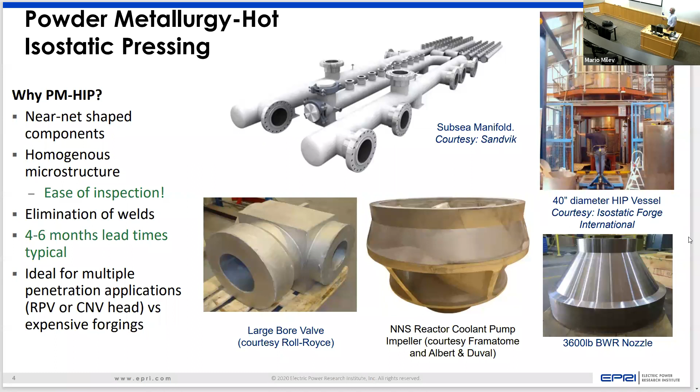This is one of the very first components we actually made out of the project. This one's at 44% scale, and the reason it's at 44% is that's the largest vessel we have today available in terms of size. It's 50 inches in diameter—about the largest we could actually put into a hot isostatic press and make that component.

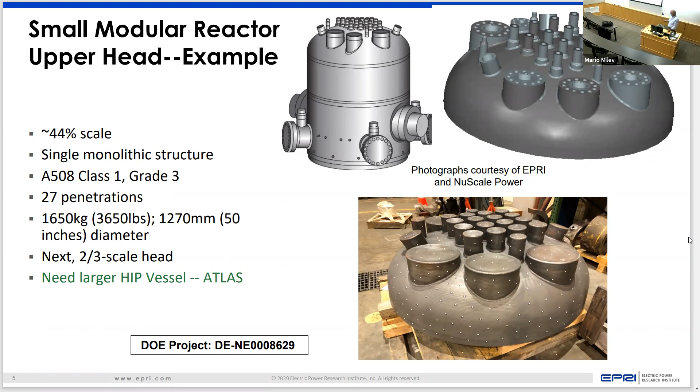This is one single monolithic structure—there are no welds whatsoever. The welds you see around here are on the can or capsule that sits on the outside of the powder as it's being consolidated. This thing actually shrinks over time as you put it into the hot isostatic press. It may take 4 or 5 hours, 6 hours to get to this size. But you can see we can make very complex structures with this technology. That's why we focused on powder metallurgy and hot isostatic pressing.

We've also manufactured the lower section. Let me step back—this is the lower assembly, and this is the lower head I'm getting ready to show you. You see the upper head on the first one on the right-hand side. So the lower section of this, we're actually making in 2 halves.

Now, obviously, that's not the way we would do this normally, but again, we do not have a hot isostatic press large enough to do that. So we're making it in 2 sections and electron beam welding it together, then going through a heat treatment to actually get to the final properties we're looking to achieve.

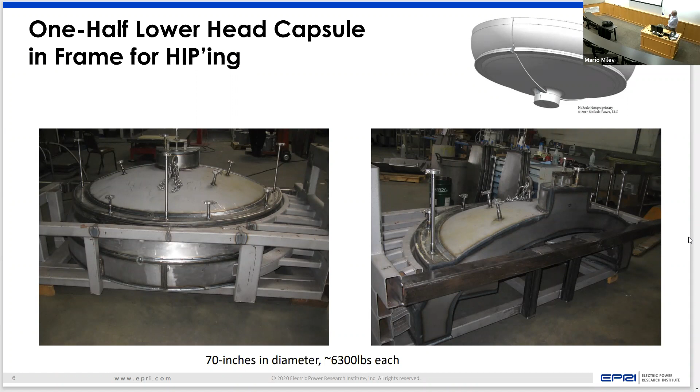So you see all of the fill stems and the vents coming off of that. It's where the powder is actually poured into the component. And then you end up with a component that looks like what we're showing here on the right-hand side.

So we then take this and actually weld it together to another half, and we end up with a solid half. Now this is upside down right now - it would actually be flipped up. So this is the bottom section.

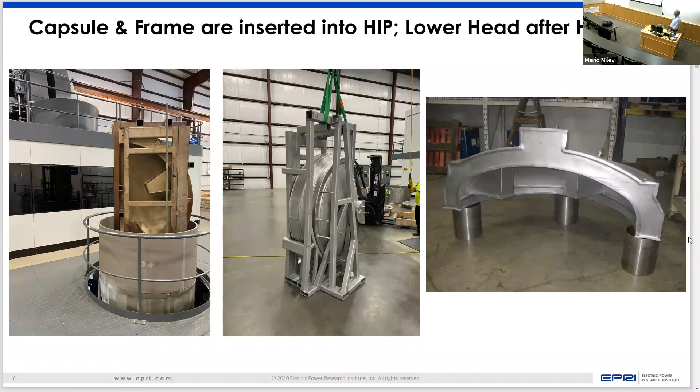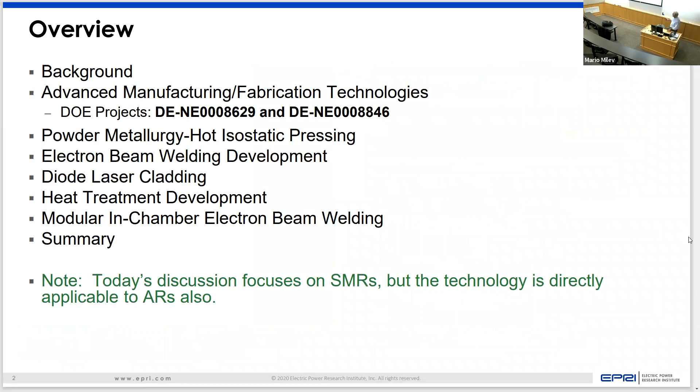So we've went through a lot of development. I guess I ought to describe one other thing here. So let me skip back again.

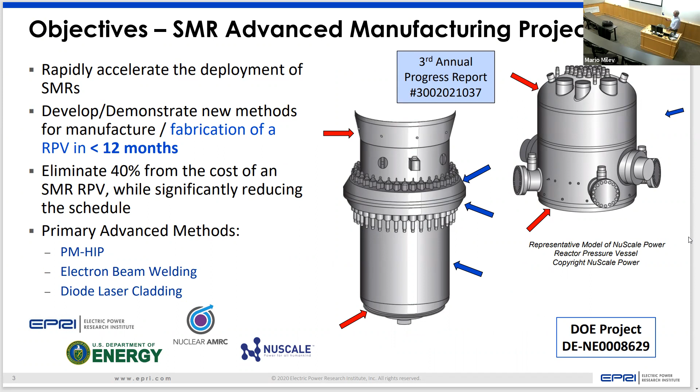So there's a transition section up here, and if you notice, we're again showing it as a red item. So we're doing it also with powder metallurgy. I typically wouldn't do that with PM-HIP - I would do it as a forged component, but we're trying to demonstrate some of the technologies, and that is what you're looking at right here. That's one of the 5 sections that will be necessary to build that circular transition section.

In trying to make this, we are using gas atomized powders. Those are air melted powders. They pick up a lot of oxygen in the overall process because you're making with an air melted process, as opposed to a vacuum inert process where you might actually do much cleaner atomization of the powders.

So as we make those powders, we're making with air melt. We've picked up a lot of oxygen and issues. It has changed our properties, and that's one of the reasons that we're really going through a lot of the discussions here. Let me talk about this.

First of all, if we're producing a powder using the air melt process, we take it through a vacuum annealing process in the canister - so this is actually in a canister. You take it through the vacuum annealing process, and you can improve the overall toughness pretty dramatically by just vacuum annealing the powder before it's sealed off and actually goes into the HIP vessel.

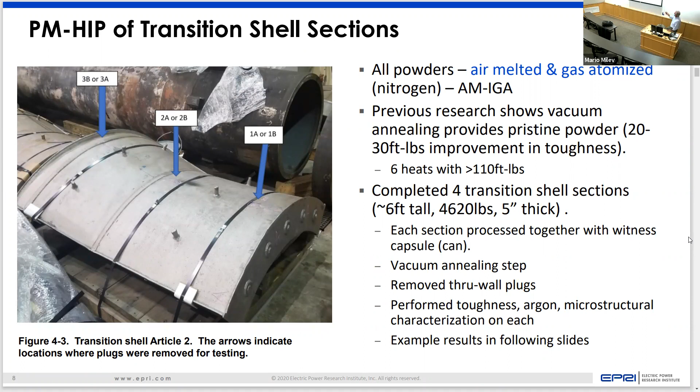So we've spent a lot of time developing that. This thing is pretty large - it's about 4,600 pounds, about 6 feet tall, and it's actually a little more than 5 inches thick. That's probably more like 7 inches thick in certain areas.

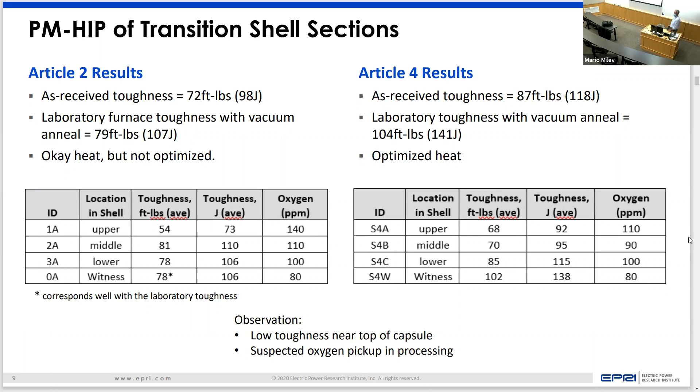So we've had to go through a lot of development. I'm not going to talk about some of that development - it'll be in the slide package, you guys can go through that. I simply wanted to introduce the concept of powder metallurgy and hot isostatic pressing. I've got a number of other topics I want to go through.

Just wanted to jump right onto electron beam welding since we've only got a limited amount of time here. And if we have time, we can go back and talk a little bit more about that.

So we're trying to make large components using powder metallurgy and hot isostatic pressing. That's the first advanced manufacturing technology that we're using. Hot isostatic pressing has been around for 40 or 50 years, first developed at Battelle in Columbus, Ohio. It's been used many, many times over the years.

We are the first ones that are really taking it and using it for extremely large parts. So there's a scale-up factor that we're having to go through, to scale from something the size of maybe this computer screen to something the size of this desk or even larger. And it's all about properties - how do you scale to get those properties?

We've shown we can control the overall distortion issues that you have, as you're trying to model these things and come in with something that's very near net shape. You saw the upper head section already. What we're trying to do now is scale it and get the properties, and we've been working on that for about 3 years. We're close - not totally where I want to be, but we're getting close.

So let's talk about electron beam welding. Anybody familiar with electron beam welding? Anybody familiar with welding, first of all? There we go, okay, got that. All right, so electron beam actually uses an electron beam to melt the materials.

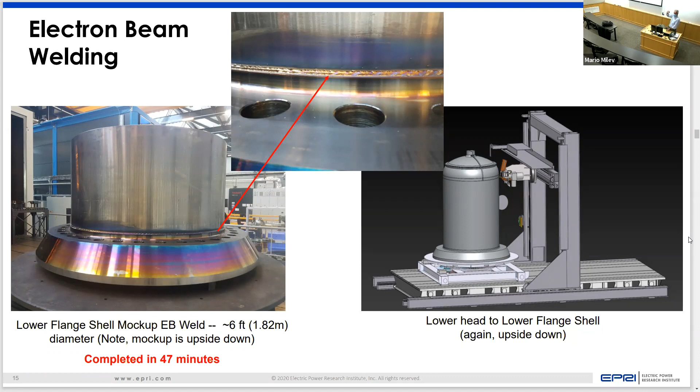This is part of the work that's ongoing at the Nuclear Advanced Manufacturing Research Center. It takes that lower head article that we've shown and actually then goes through and machines it and allows us to put all of that together and weld it together with the electron beam process.

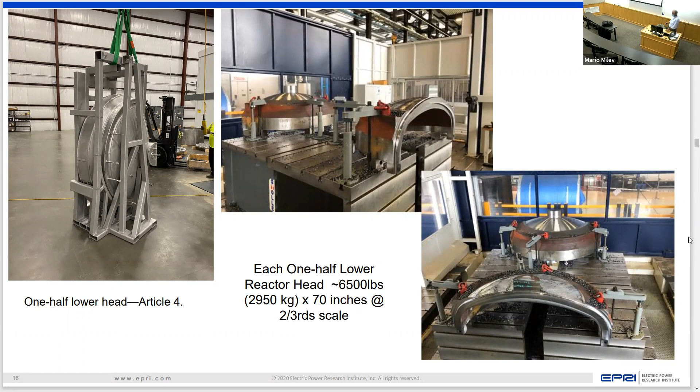A little bit more on the welding. You can see where it's actually been completed here, the weld here. This top part of it, which is actually the bottom part, will actually be done with additive manufacturing. It's a support plate, so it really doesn't have to have anything but structural integrity. It's not toughness that matters there. The toughness and strength actually matter for the rest of the vessel.

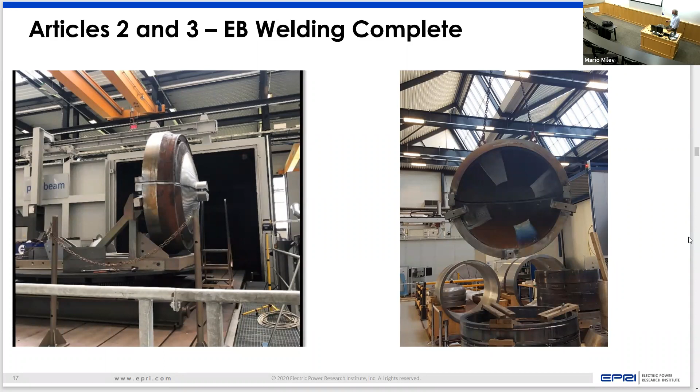This shows a little closer view, the actual weld joint and then the actual weld that's been done here with this particular component. And then this actually goes to final machining.

So a lot of big parts that we're working with, these aren't the biggest parts. If you look at a conventional reactor, for a boiling water reactor, we're probably talking on the order of 18 to 20 feet in diameter, maybe larger in some cases. For a pressurized water reactor, you might be talking 12 to 16 feet, somewhere in that range.

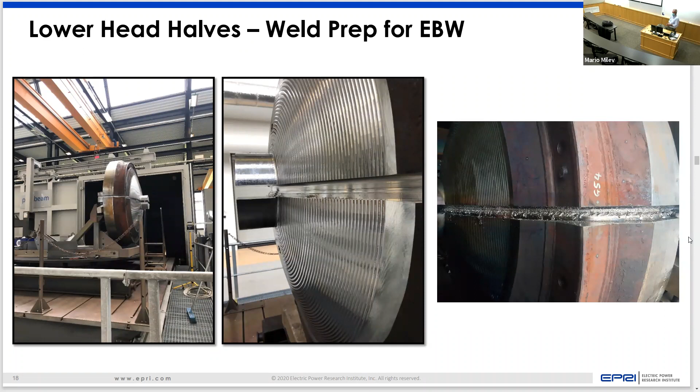These are, again, going to be at about 10 feet in diameter for small modular reactors. And then as we get to advanced reactors, that's actually probably going to collapse even smaller in terms of overall size. So that's another technology. That's a significant game changer again for industry.

We are working with the Advanced Manufacturing Research Center, but we've got Babcock and Wilcox working with us, Doosan, NuScale Power, the Welding Institute out of the UK, and many other folks like Rolls-Royce that are really engaged in the overall discussion and trying to implement this technology and take it forward.

A third technology is diode laser cladding.

So normally when you manufacture a component, a large reactor vessel, you will want to clad the inside surface of those components for corrosion performance. They're either clad with an Inconel, a nickel-based alloy, or probably a 308 or 309 stainless steel, which again gives them the corrosion performance on the inside surface of the vessel.

Normally, we've used submerged arc welding or electroslag welding, which puts down a very large bead. It's all semi-automatic at best. So what we're trying to do is automate the process, and diode laser cladding enables you to do that. It also enables you to put down a much thinner layer on the surface so you get less distortion overall.

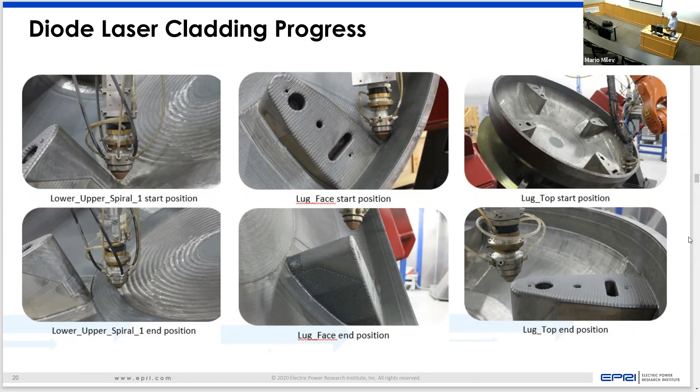You can see a number of different computerized welds that have been done here, or clads that have been applied to the surface of this. What you're seeing here is actually one of the support structures that's inside of the lower head. So inside of that head, you've got to have support structures that support the rest of the reactor internals. You can see a lot of the different welds that have been performed here. Again, this is being done at the Nuclear Advanced Manufacturing Center.

There were probably 8 or so different programs that we had to develop to actually weld this component, but we fully automated the process. You could go out today and utilize that to clad the inside of a reactor. This was a very difficult, complex problem, but computerization obviously allowed us to do that.

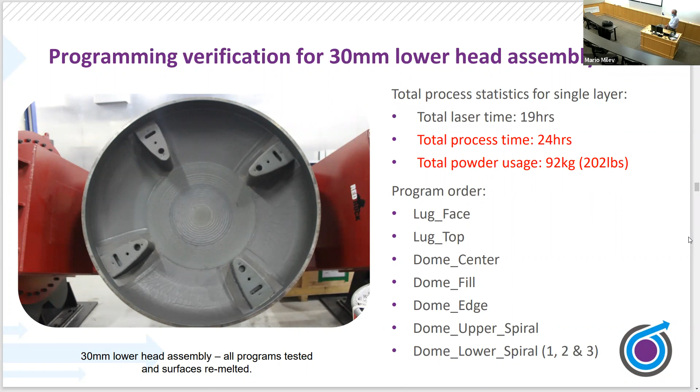We've reduced the time to do this to about 24 hours from probably a 2-week cladding process. That's a pretty big game changer. Another big changer is we only used about 200 pounds of filler material on this. The small modular reactor we're talking about will have enough surface area, basically the same surface area as 2 Olympic swimming pools, because it's clad inside and out. So by reducing that overall amount of filler material, you're reducing cost and reducing the overall amount of time you're trying to apply that cladding to.

So that's 3 of the technologies we've worked on. Another technology you look at and say heat treatment. What can you do in heat treatment that is revolutionary and can significantly help industry? We've been focused primarily on looking at how we can eliminate the weld.

Basically, once we've done electron beam welding, we're not putting any filler material in it. So you don't have the issue that, depending upon the filler wires used, can lead to embrittlement of that structure over time. Many of the early reactors built in the US used somewhat inferior filler materials, in terms of tramp elements like phosphorus, sulfur and copper, which ultimately led to embrittlement of some of those. We have to watch those very closely. We know where those are at and we know what the life of those are.

What we're trying to do here, though, is because you're not putting any filler material in with the electron beam process, you go through a heat treatment situation where you can actually essentially remove that weld. So if I remove that weld, do I really need to inspect that at 10-year intervals? Normally I inspect every weld in a reactor vessel at 10-year intervals. Will I have to inspect this now?

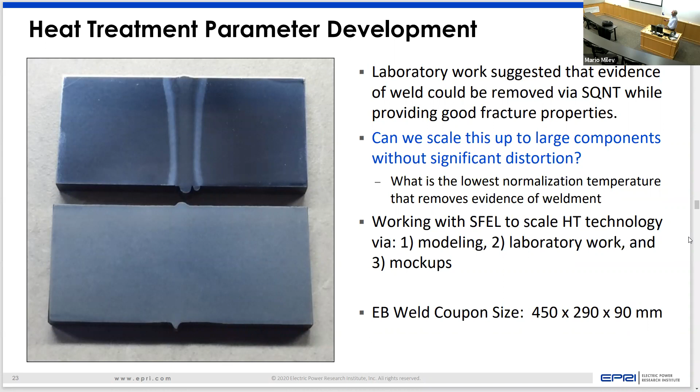We've done a lot of heat treatment work to understand those, and essentially we've arrived at working at 875C, still providing good properties. You can see the trail off here, but we're showing good properties in terms of toughness at around 875C heat treatment. That heat treatment involves a homogenization, a quench, followed by a hardening or normalization of the material, another quench, and then a temper.

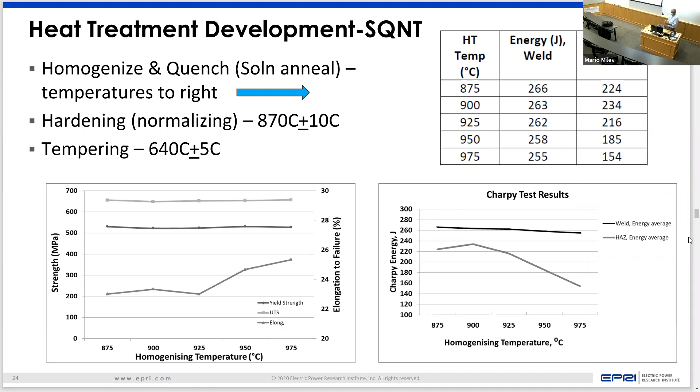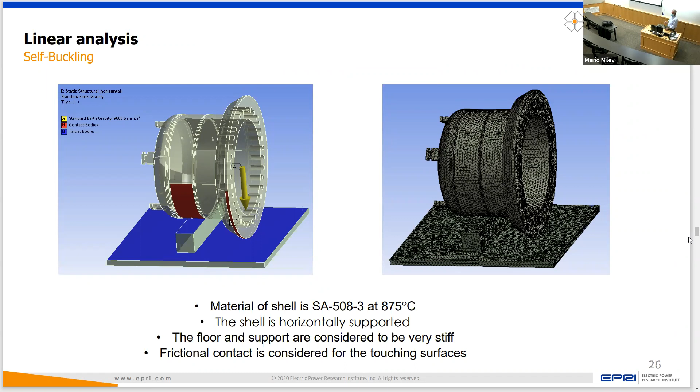So it's reasonably complex. You got to think about this in large sections that we're working with. How do you heat treat those without distorting them? So we've been working with Sheffield Forgemasters, a large forging house, to go through some very complex analysis on these and modeling to understand what the stresses are on those and what types of distortion we might be seeing. We basically said, yes, we can do it. We're now in the phase of taking this forward.

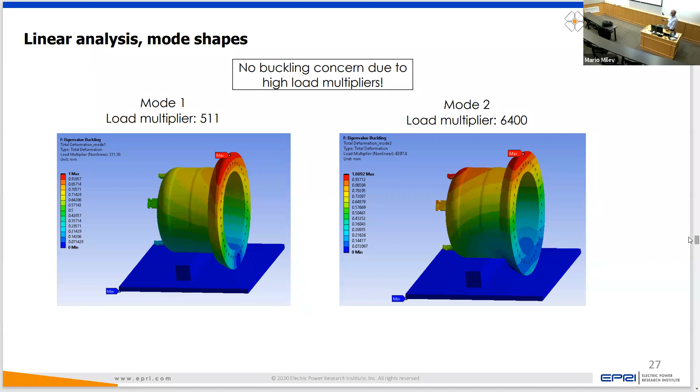We've done one smaller section like this, which represents a head we'd be working on, and one shell section we worked on. We're now moving to a larger size, with the full intent that one of these days we can do this at full size without any significant distortion. So this is a big deal - large forging house, lots of heat, lots of issues ongoing in the large forgers that I'm not typically engaged with, but this is a pretty complex problem.

So this takes me back to this component - the lower head, the shell section, these two flanges, and then this transition section. So big components.

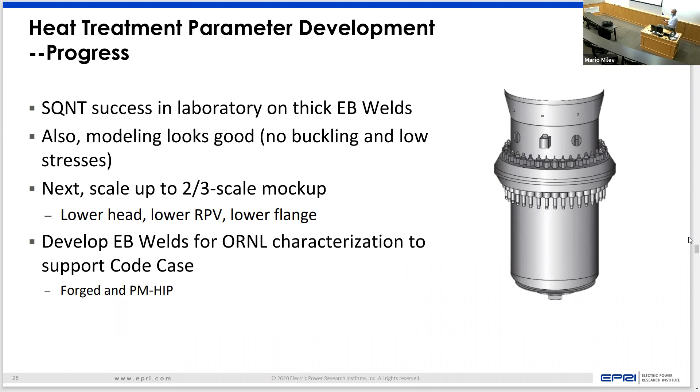From a modeling perspective, we've been able to demonstrate that we don't think we're going to get significant distortion. We've done it at smaller scale. We're moving to two-thirds scale and then eventually full scale. A lot of this work would then support a code case that would go in front of the ASME boiler code to allow you to utilize the technology, and then the NRC would have to come on behind that as a regulator to support the use of the technology.

So that's four technologies I've talked about. One of the other big projects, an entirely separate project in and of itself, is looking at that large chamber you saw - it's not large enough to do a full-size small modular reactor. Even a small modular reactor might be on the order of around 35 feet in total length or height. So that vessel section, that chamber, is actually not large enough to do the heat treatment and/or the welding.

So we're actually looking to set up a modular vacuum chamber that'll allow you to do this process. Let me walk through that in the last 15 or so minutes here. So I showed you this a few minutes ago - this is the large weld that we did in 47 minutes.

What if we could actually build a chamber that you could take apart and put back together, depending upon the elevation of the weld you're trying to make? This one only has two welds represented here. Let's imagine this gold section is the reactor vessel, so this is the shell section. Here's that large flange, kind of what you see here. So that's the first elevation, but you need to get to this next elevation too.

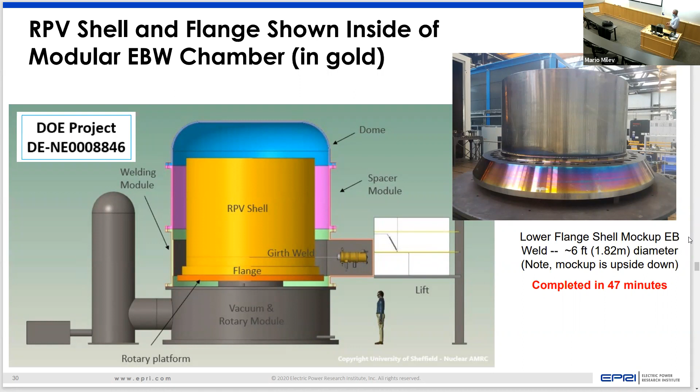So we've been working on that - this was a concept we had. We're working very closely with BWXT and the Navy to do this work right now. The Navy's very interested in this, and you can think of why they might be interested in large diameter vessel applications. So we've been trying to do a lot of modeling to develop that.

Again, the green section here shows where the shell section would be. We've done a lot of development around how this platform looks. We're into the second year of this project, and the project's really taking off. We're actually making lots of large components now, making these large modules for the overall welding application. We've already manufactured the electron beam gun that you see here - I'll show you a picture or two of those in a moment. A number of the controls are already done.

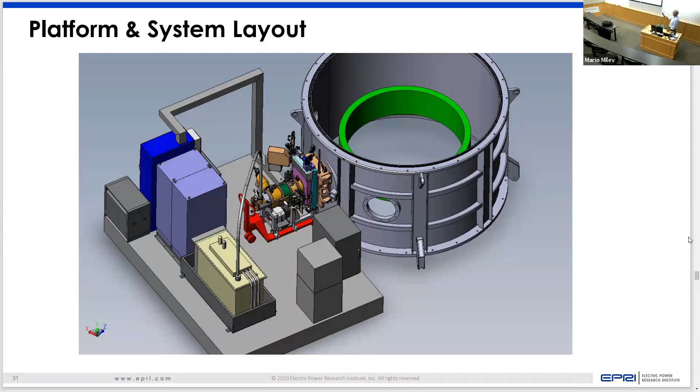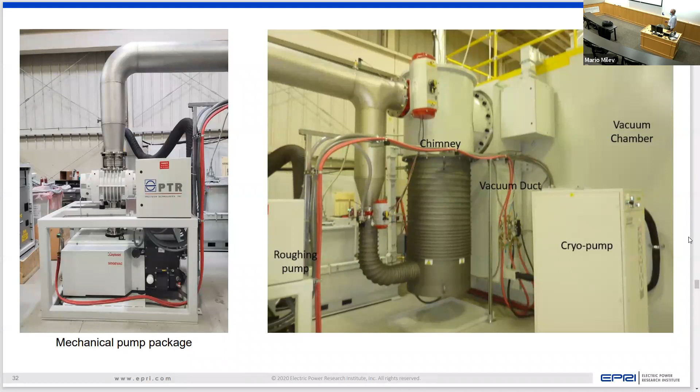Lots of things still need to be developed in this project though. We've been working on developing some of the pumping capabilities. Think about this thing - it's 35 feet high when it's all stacked up. I can't sit there and wait for days for this to pump down to 10 to the -3. It takes a long time to pump that. So we've got capabilities based on all of our design work - we think we can pump it down in about 2 hours. That's what we're working toward right now, large pumps in terms of what we're trying to manufacture here.

This kind of shows some of the overall equipment. There's the vacuum chamber.

This is a chamber that we've actually set up in Connecticut with a group called PTR. It's a smaller chamber, and we're trying to test out all of our equipment and make sure everything works, especially our big electron beam gun.

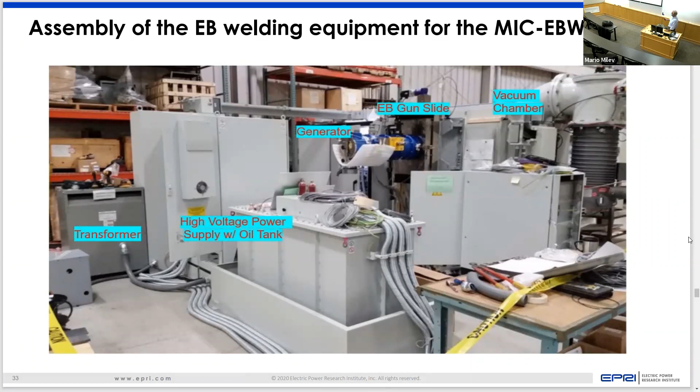We're using a different style gun than what we've used in the UK. It all had to be developed domestically because this is a Department of Energy funded project, so we're developing it with our counterparts in Connecticut. You see some of the transformers and high voltage packages.

This is the electron beam gun itself. It's about 1,000 pounds. It generates the large electrons that are necessary to go in and actually make those 4.5 inch thick welds that we were talking about.

This is just a big slide package that's sitting on the outside of a small vacuum chamber right now, again, to test out the technology.

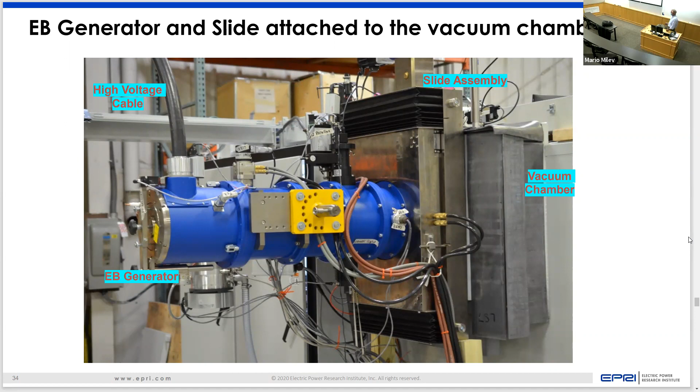When this is done, which I think will be probably the first of 2023, we will start welding and do a number of welds with BWXT out of Ohio, and we'll start then to make large reactor vessel weld sections with that technology.

The ultimate goal of this is NuScale Power will look to use BWXT to manufacture many of their reactor vessels themselves. So this is real time, something that's going to be used. Lots of industry initiative around this, and lots of industry interest, not only domestically, but internationally.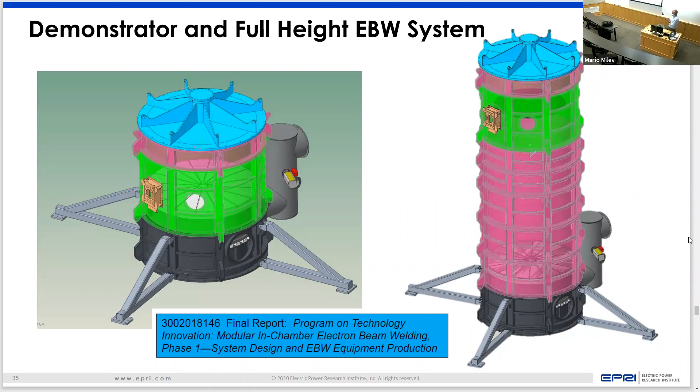I mentioned Doosan a minute ago. Doosan's also working with us here in the US to try and perfect some of this technology. Doosan's obviously from Korea, and they will be looking to utilize the technology for manufacturing some of their components too. So lots of interest in trying to take the technology forward.

Lots of sections that go into putting this thing together, so it's not just what you saw on the outside. These are full scale or to scale size components.

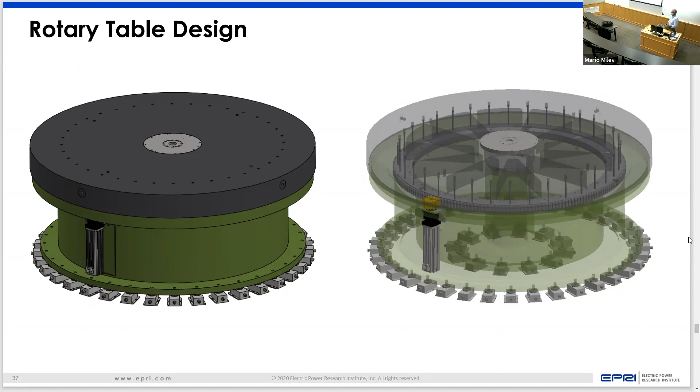Large rotary table that sits in the center of this thing. We have large rotary tables already today for doing a lot of machining processes. That's what this will be, but it will be inside the vacuum. Believe it or not, you have to use different greases and different things as you put them into a vacuum chamber too. So lots of learning on that overall process.

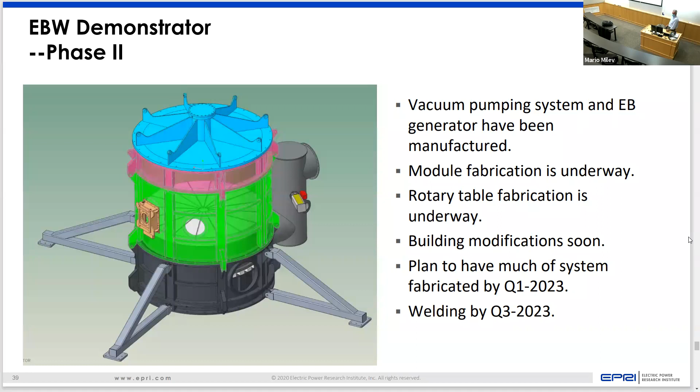So I've showed you a number of different technologies. I haven't talked about additive manufacturing. We've got a number of projects ongoing in that area supporting both ASME applications and trying to bring the technology forward. I know many of you have been involved in additive projects.

You already had made individual parts, but when you start making large pressure retaining parts, say I want to make a valve, you got to meet certain properties, you got to meet certain criteria, and you got to be able to do it repetitively. So we've worked a lot with people like Oak Ridge National Labs and Westinghouse and Rolls-Royce and others to bring some of that technology forward.

We're close. We have a code case in front of ASME right now, and actually there's a second code case that's followed right behind on directed energy deposition additive manufacturing. So there's work ongoing there.

You've seen some of the other things that we're working on here in terms of the project that's shown in the center and then the project that's shown here. The other thing I didn't talk about is adaptive feedback welding.

Many of the technologies, many of the components that you find in a nuclear power plant are either welded together with manual stick welding or they're welded together with gas tungsten arc welding.

Gas tungsten arc welding, when I started my career back in the mid 80s, was using semi-automated gas tungsten arc welding processes. Today, it's still using semi-automated gas tungsten arc welding process. Why haven't we automated the process? That's what this adaptive feedback project is about. How can we sense the weld puddle that's actually being put down, understand when we've got issues, make corrections on the go, and actually do a fully automated process. So that's where that project's going.

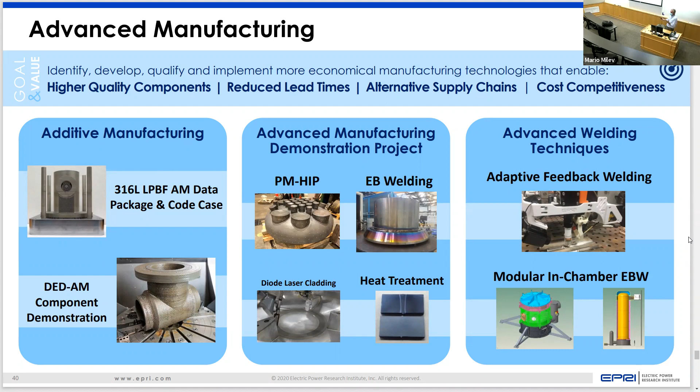And with that, I really won't go through the summary slide here. I think you can read that. We talked about four or five major technologies that industry is going to utilize. I guess at this point, we can open up the table for some discussion. I might be a little short on time here. Thank you very much.

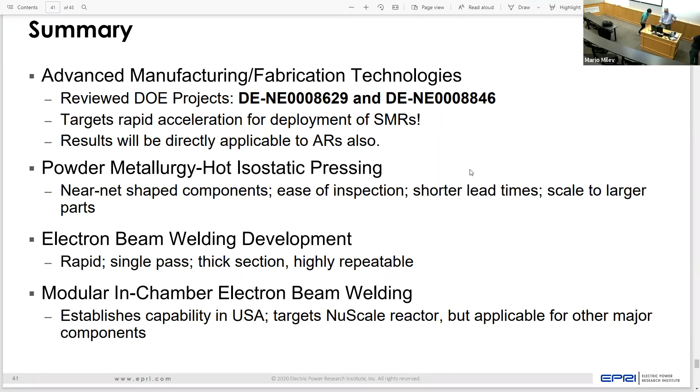Yeah, and I didn't, let me step back here. Can we? Just go easier this way.

So we've done a number of tests on components, trying to understand, can we remove residual gases out of the vacuum chamber itself? The diagram that you see here on the right, we have a 20 by 20 by 10 inch thick component that we've heat treated, or we went through the vacuum annealing process to try to get rid of any moisture, any residual gases that sit inside of that. You can see the orange line here, that actually represents a line, a location where we buried thermocouples into the center of the component to understand where we were getting the temperature first, and secondly, can we actually measure residual gases coming off of that.

We went out to almost 44 hours before we actually arrived at the temperature we thought, but after about 6 or 8 hours we were getting close. So we were not fully reaching the annealing temperature to get rid of residual gases. Hence, we still had oxygen in the part, and our toughness was much lower. We were able to show at different locations and elevations in one of those sections that we weren't getting the right temperatures. So it affects microstructure, oxygen content, and toughness. Hope that answers it - long answer for a short question.

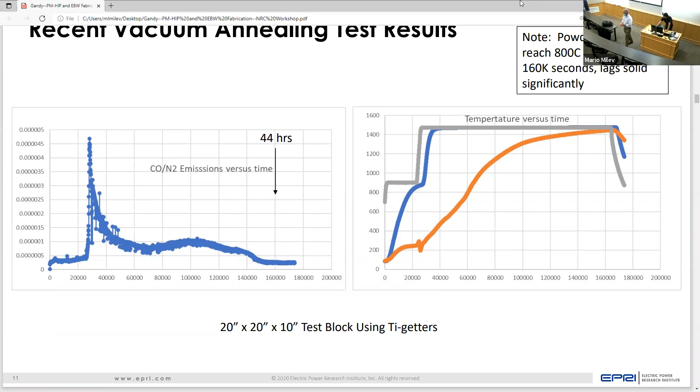So there are a lot of processes here that are impacted. Do you foresee, or is this too crazy to think about, doing a good chunk of these steps in the same kind of chamber environment - making it a one-stop shop, so to speak? Do these really need to be in separate processes? They really do need to be separate.

Now, there is an electron beam process that TWI, the Welding Institute, is working on in the UK right now - a smaller chamber that actually follows around the weld. They've been working on it for a number of years. They're not quite where they need to be, so we kind of opted to go this route. Hopefully both of them will get there - that's what I'm hoping to see.

Are there thickness or material limitations to electron beam welding? We have shown electron beam welds that we've developed up to 8 inches at this point. I think that's probably about as thick as it will go at this juncture, but you could go at it from both sides if you wanted to. So realistically, probably not beyond that. I know that some rotors have been welded with the technology, and a rotor, depending on the size - whether it's a fossil or nuclear rotor - can be pretty thick. So yeah, it does have limitations, but I'm not sure what those are at this juncture. We've done 8 inch, which is a pretty darn thick part.

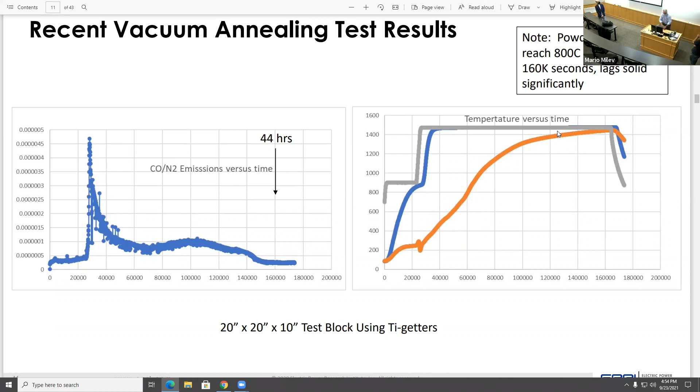All right, any more questions here or on Zoom? Again, this wasn't a very technical discussion—trying to introduce you to a lot of different technologies here. We can go as deep as you want into any of these. I'm more than happy to do that, but I thought it was more important to expose you to a lot of different things we're working on.

All right, last chance—since it's already there, you mentioned the reduced inspection. Have you tested the products in the radiation environment and tested the reliability, any issues that came up different from traditional methods? As I mentioned, we have both PM-HIP components and electron beam welding components at the ATR up in Idaho National Labs right now being exposed to radiation and being tested.

We don't know what the long-term effects of those are. What we're trying to do is develop the technical data that allows us to put some of these in service. So at this juncture, I don't really know what that might be.